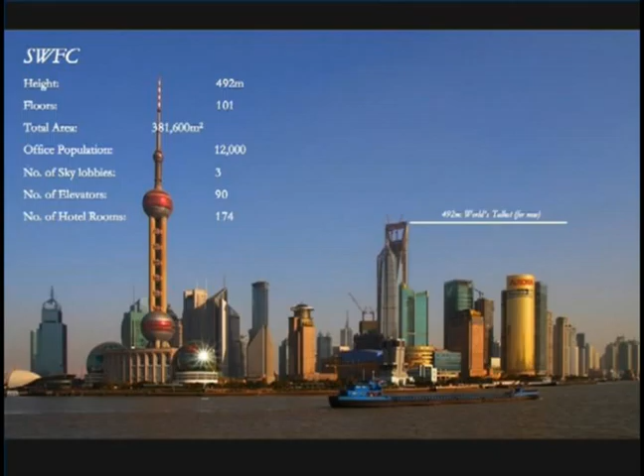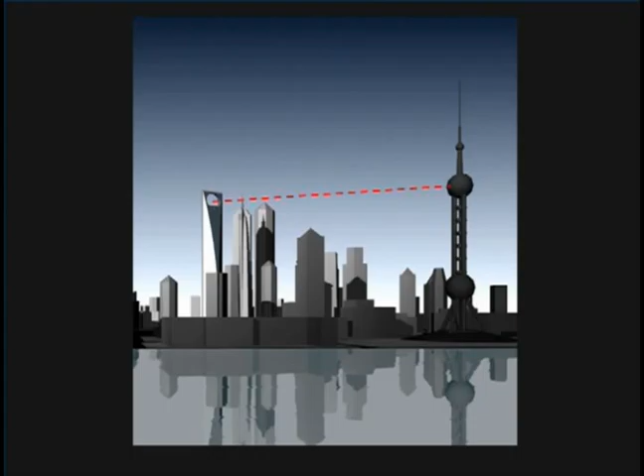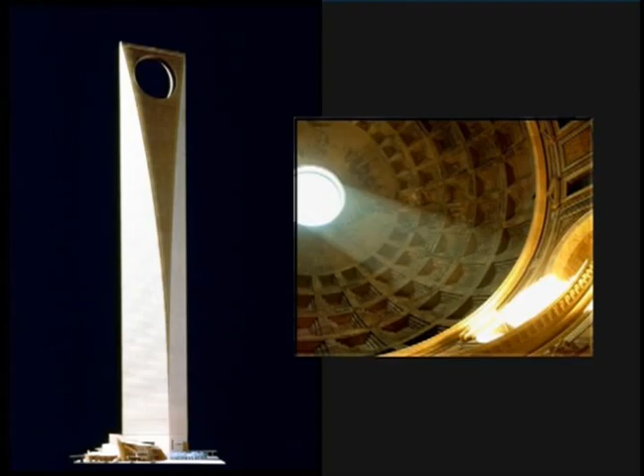So we carved a big window at the top of the building that then faced the TV tower, and the idea behind this window would be that it relieved the tremendous wind loads at the top of the building, therefore greatly making this height structurally achievable. And then this window would be a connection to the cosmos, almost like a sundial. We called it the moon gate, so something that also connects not just to the city, but to something beyond.

Now, this project gained a lot of press because it's being built by a Japanese developer in Shanghai, and the circle was seen as something else other than the cosmic connection or this wind gate that we intended. So the question was what to do with this circle.

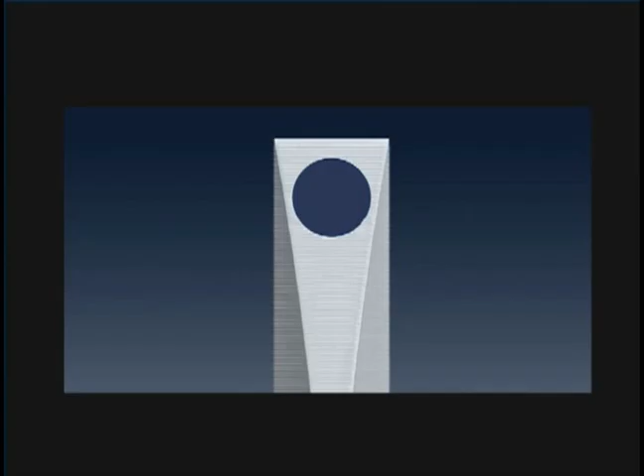Now, this, of course, is a joke, but we did consider at one point to put turbines in this void to try to capture the wind. But when we actually looked at it, and this was discussed yesterday in some detail, when you think about the embodied energy that goes into first taking the material out of the earth, refining it, transporting it, and the workers, all the people involved in that process, and then the food that they eat, when you add all that together, is the output of that turbine really equal to what goes into it? So I call this the sustainability of addition.

I think a lot of trends now are to add double walls, to add photovoltaics, to add a lot of stuff into a box. But what I'd like to talk about today is sustainability of subtraction, in which you take out everything from the building which you don't need, and then try to find in the form, the function, and the engineering of the design an inherent sustainability. And then maybe there is some truth to this old statement.

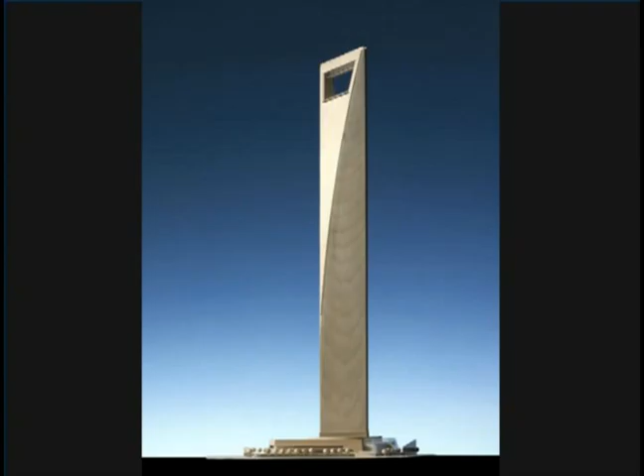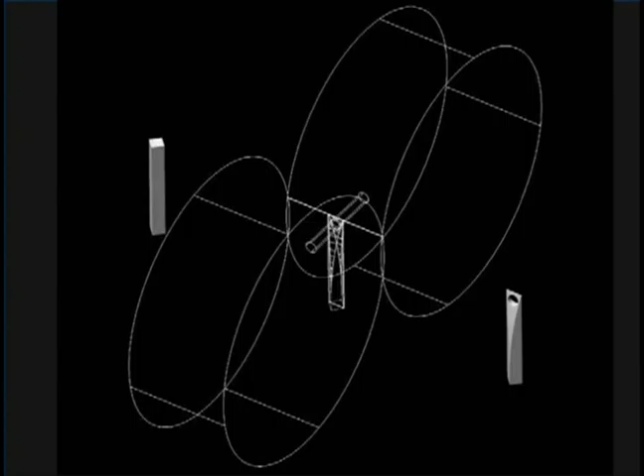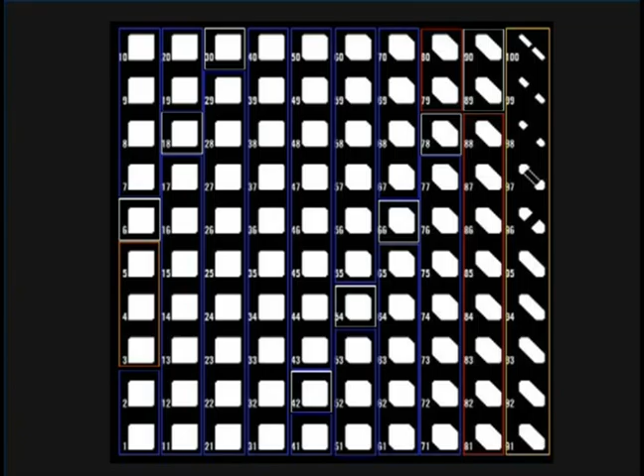By shaving away the building, by carving it, it yields a range of floor plates which are then suited for the office in blue, transitioning to a hotel where you would actually prefer this bar shape in red, and then finally to the observation areas where you really just want a long shape which maximizes the views. So really the result, I think, is one of a sort of timeless purity that really recalls some of the primal beginnings of architecture in tall buildings.

Now, as David Scott mentioned, this conference has been a great place in terms of talking to people, getting new ideas, and using that to refine your own thinking. Lee Morris had a very great presentation talking about the dire state of the climate if we continue our current approach.

So I was thinking about how do we do things not one building at a time, but across the board in one big sweep. How do we make sustainability scalable as well as affordable so that clients will be interested in this? So the idea is, again, to subtract rather than to add.

So if you think of the construction cycle, Burj Dubai was 3 days per floor, Shanghai Financial Center 4 days, only made possible if the forms are rational and systematic. And if you do feel compelled to twist or lean your tower, do it in a very intelligent way. I know David Scott has found some great ways to do this, and I do hope you get to make your presentation someday, David.

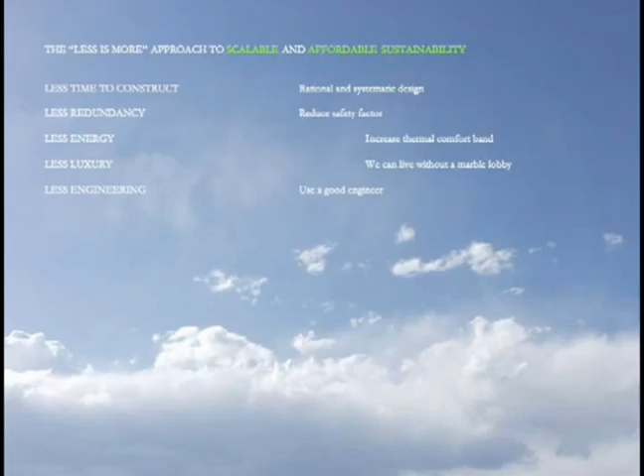And finally, less engineering. I think this is really, you find a good engineer. And what I mean by less engineering is an engineering that is extremely elegant. I think the best engineers I work with are those who have found the simplest solution. And it's often the simplest solution that's the hardest to find.

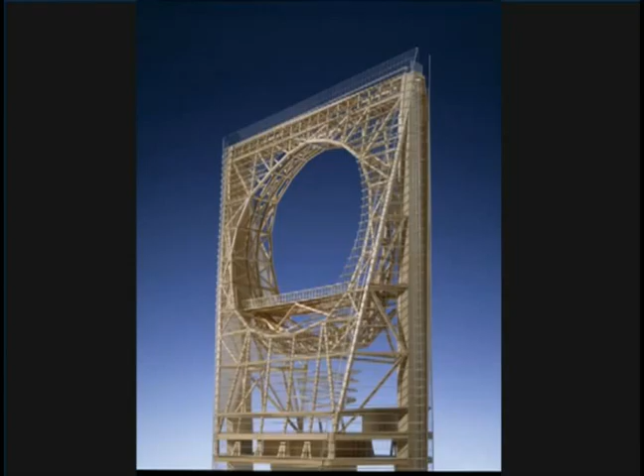So this leads me into introducing Les Robertson, who was our collaborator on this project. This is the Swiss watch that William Baker referred to yesterday. So this is looking behind the facade of the watch and seeing the gears on the inside, what really makes this building tick.

Now, the original design for this structure, the tower was originally 460 meters tall, was essentially a concrete shell with punch windows, extremely heavy, and it didn't quite fit into the image of the building as one of transparency and glassiness and simplicity.

So when the building had to get even taller, and the foundations at this point had already been put into the ground, is when we engaged Les Robertson, a great structural engineer, I also think a structural magician, because he took this structure and he made it disappear. Okay, Les?

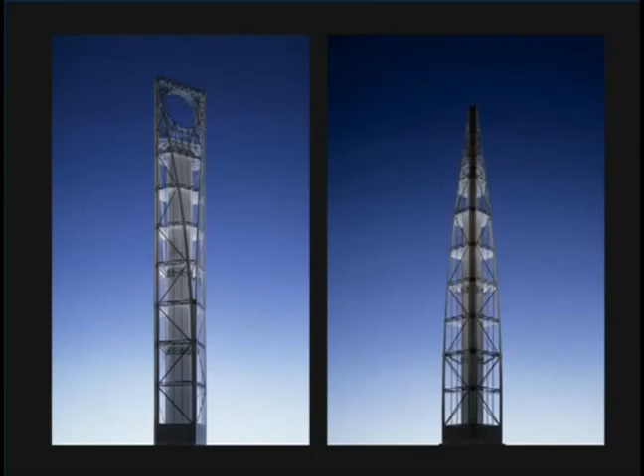Well, I guess the role of the structural engineer in improving the energy consumption is mostly the reduction of materials that go into the project.

And I was going to tell you that we're motivated by such thoughts that we had worked very hard to reduce the material in the project. But David let the cat out of the bag when he pointed out that the foundations had already been installed and that we were going to build a bigger building on the existing foundations.

The project had a kind of a tumultuous history in that it started with concept designs for the structure done in New York and all of the architecture work done in New York. And then structure, MEP, and so forth all moved to Japan. Designs were completed.

As Mr. Malott pointed out, the foundations were installed. This was the piling.

At that time, a major Japanese company, Nippon Steel Company, came to us asking if there was a better way to do the structure. And we thought about it a little bit. We said yes, there was, and produced some designs. And just at that point in time came the Asian financial crisis, and the project went on hold.

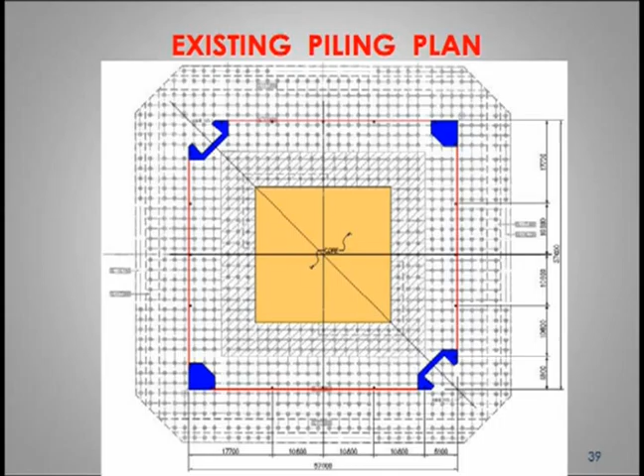Existing piling was laid out assuming that there would be loads from the services core and then 4-point loads at the corners. We realized that we had to enhance not just the piling, but think about how that load was distributed to the piling. So we put in a distribution network above the mat foundation so that we could take loads from the services core and distribute them outward, and conversely take loads from the exterior wall and distribute them inward.

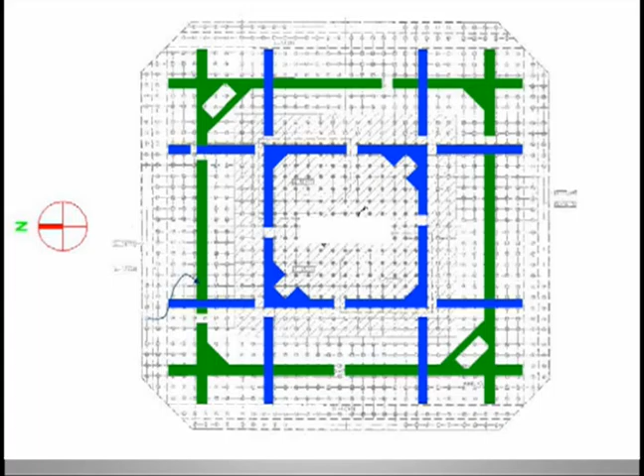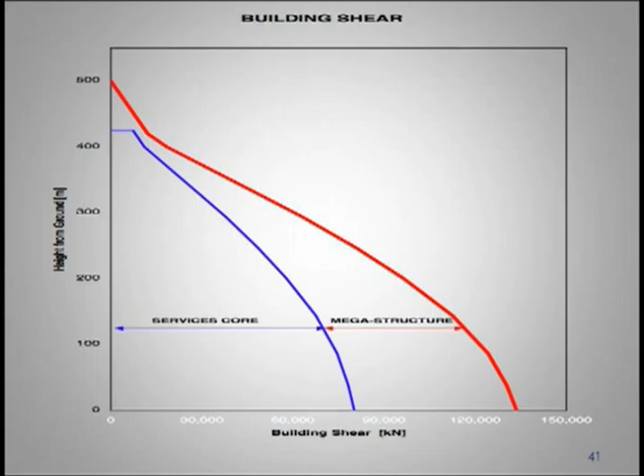This is one of a variety of distributions that we tried, looking at how we would divide the load between the services core and the perimeter structure. Now, fundamental in our belief for the design of a major building is that it be very robust and that it be very redundant.

So our approach to this was to use small columns on the perimeter of the building and to transfer the loads from those small columns to major columns, mega columns if you will, in the corners. In this way, we could design the building so that we could take out all the little columns at any level of the building, and it did not result in further collapse of the building itself.

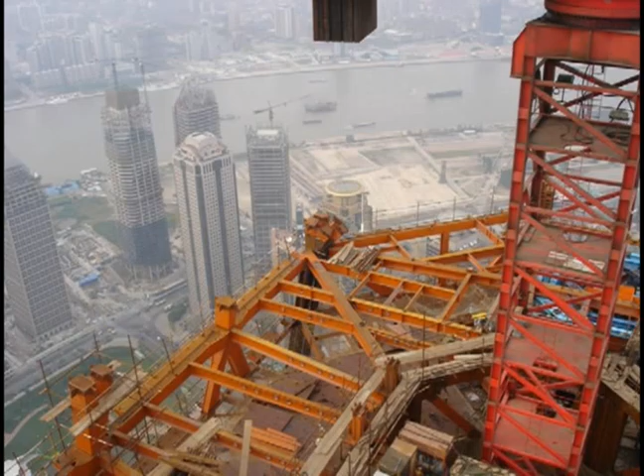And conversely, we could take out these distribution trusses. We could remove one, and still the structure would remain stable. So the kind of robustness and redundancy was fundamental to the design of the project. And here you see up in the airways one of those belt trusses going into place on the left side of the screen.

We used outrigger trusses, and normally outrigger trusses are organized so that they cross the services core—there's nothing wrong, it's a perfectly good way to do it. But in this case, for a variety of reasons, largely because of the shape of the building, the services core was laid out across the diagonal, and therefore it was not practical to carry the outrigger trusses across the core. So we carried them around, and the truss work you see here in red is in fact ultimately buried in reinforced concrete.

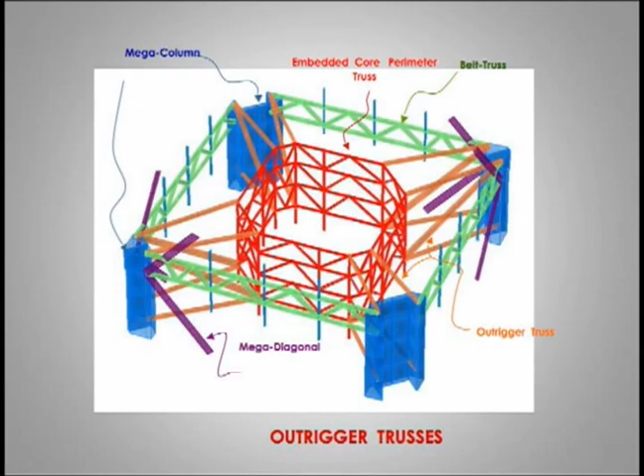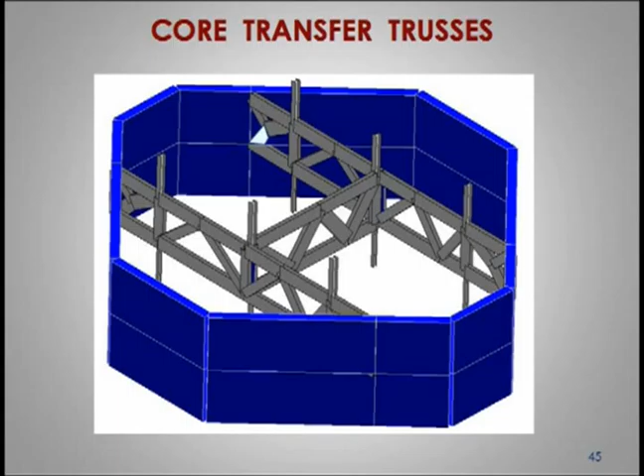And in the services core, we had a similar thought: the columns that support the loads in the center of the services core are transferred every 12 or 15 floors out to the walls of the services core itself. Again, this was designed so that if something should happen to one or more of those columns, it did not result in a catastrophic event in the building. In fact, if one of the trusses were taken out, it again did not result in a catastrophic event for the building itself.

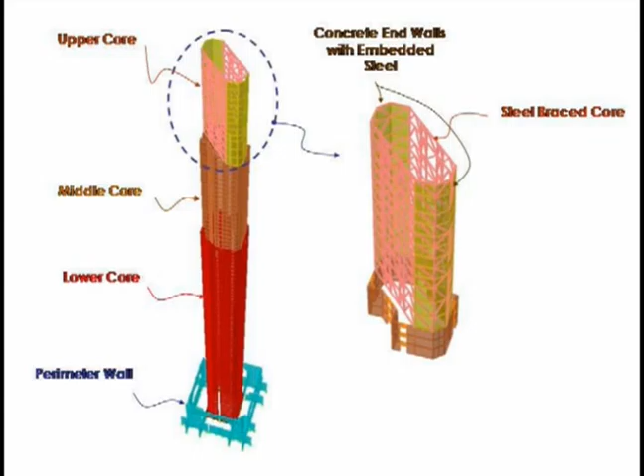And there was a further advantage: now all of the basic load carrying capacity in the building is in reinforced concrete. By using appropriately equivalent concrete strengths and properties in the core and in the mega columns, the issue of differential shortening between the various columns is reduced quite significantly. Also, all of the steel columns can be made quite small because conceptually they're the same height from the bottom of the building to the top, designed to carry their immediate load down to a transfer truss, and also to be able to step in and carry additional load where required in the event of the failure of other columns or trusses.

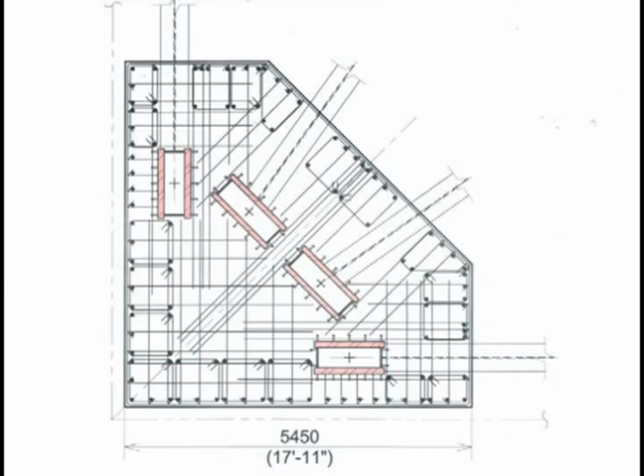The services core steps back as the building steps back, in the same direction. Now, those of you who work in earthquake design realize that lateral transfer of shear walls is a significant problem, and that was worked out through a variety of techniques developed in considerable detail with the seismic experts of the People's Republic of China.

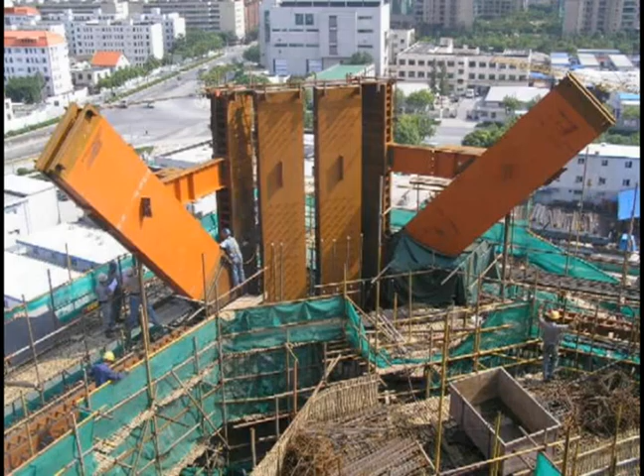These big columns in the corners of the building are in fact big columns, because they are carrying, in essence, almost all the weight of the building in reinforced concrete.

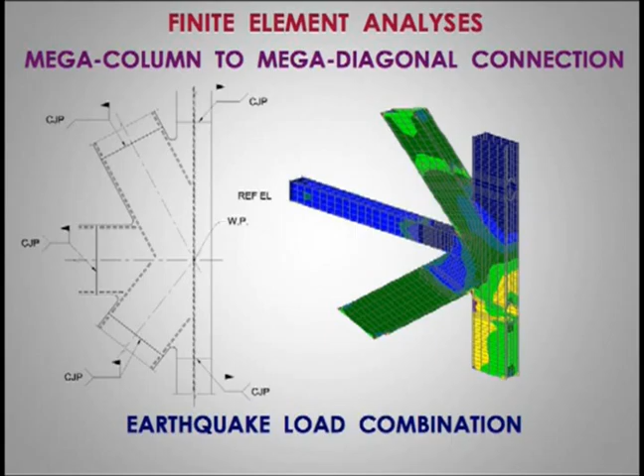So these columns have a dual function. They tie together the structure, the structural steel brace structure on the perimeter, without the need to create three-dimensional connections in the structural steel. If you look at the columns here, you see they are separated. They are not in fact connected except by bonding them together through the reinforced concrete. It's a kind of moment-free transfer between various elements of the structure, and it bonds the entire perimeter structure into a single structural element without the need for those three-dimensional connections in structural steel.

And here you see, in full scale, one of those columns. The construction was, as Mr. Malott said, roughly a 4-day cycle for the building, for the major structural steel components.

The connections of these major elements were accomplished in a way that's in some ways unusual. These are all box members, but the members in the horizontal plane, the ones going in and out of the picture, are in fact not connected at the ends. They're used to stabilize the box section, and they contribute to the L/R of the members, but they are not actually connected. This is done simply to save money and material, since the strength requirement for the box section is on the 2 side plates, not on the remaining 2 plates.

Seismic design was a very major consideration in the project. Although Shanghai is not a great seismic center, the Chinese experts and ourselves were both concerned because the building was substantially outside of the experience of the People's Republic of China. So many different kinds of earthquake analyses were performed.

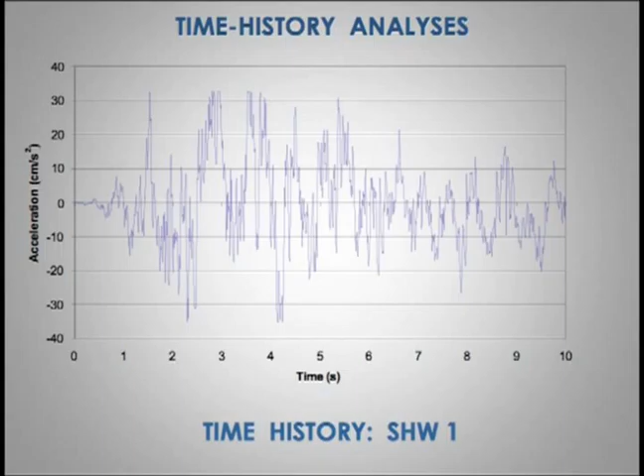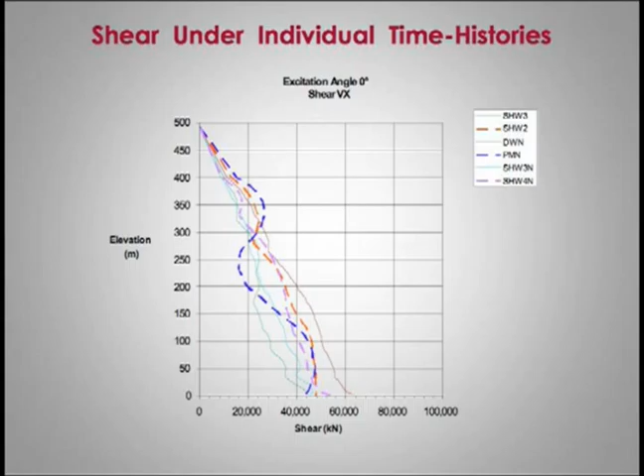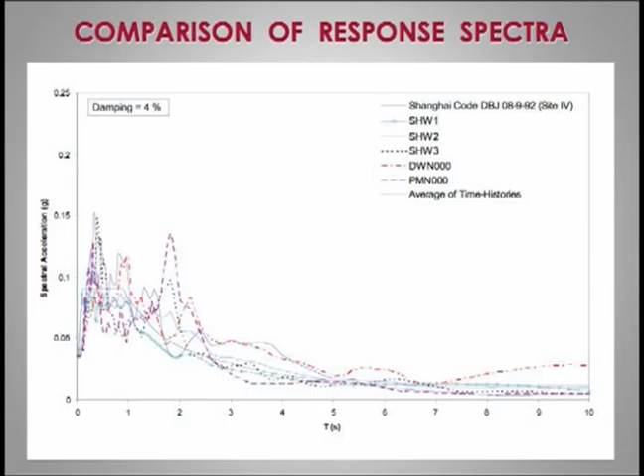And the response spectra is kind of interesting. We were quite surprised because when we put a bunch of them together, we found that the Chinese code and the average of all these were more or less in line. Now, our structure is way out on the end here, in the 6.5 second period range, so the differences were not significant.

I know some of you who attended the session yesterday afternoon appreciate the fact that there are great uncertainties. The actual waveforms that the structure needs to respect are quite significant.

We modeled pretty much everything in the building in order to fully understand the behavior of the project. One of the more interesting ones is the pushover test. For those of you not into such things, imagine the Jolly Green Giant leaning against your building and he pushes and pushes and pushes until it falls over.

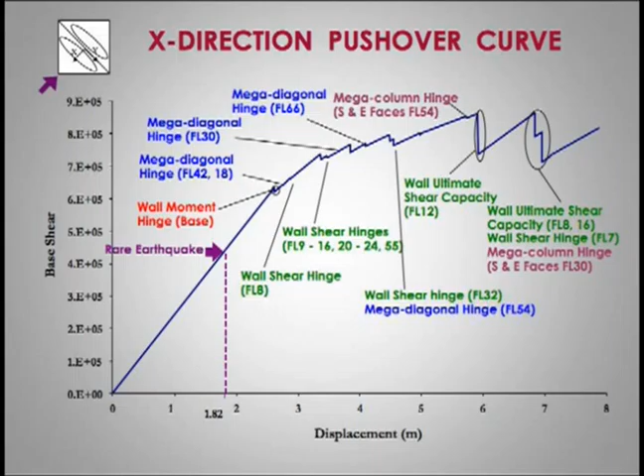This is actually an early rendering of the pushover curve. For the rare earthquake, we had a certain level of deformation, and then we started to develop moment hinges in some of the walls, and then the mega diagonals. None of these are really critical to the stability of the building itself. Then more wall hinges, and ultimately we started getting mega column hinges, and then you start worrying because you realize those will ultimately lead to the collapse of the building.

But you see, that's almost 4 times the lateral deformation expected in a rare earthquake.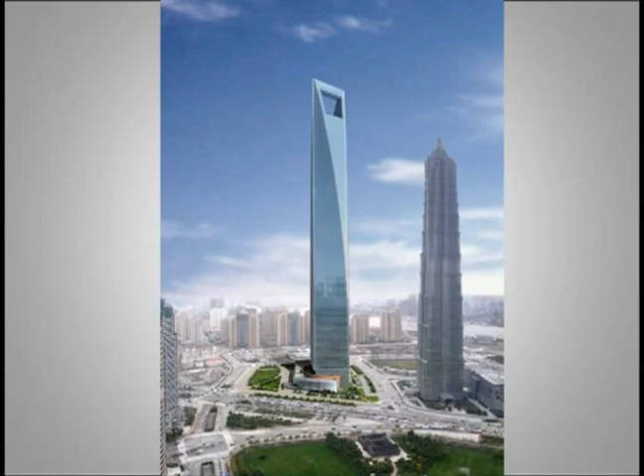David didn't talk to you about the shape of the hole at the top of the building, and if you want to know about it, you'll have to ask him, because I refuse to answer that question.

But the original, what did we accomplish? Well, the original building, if we stood on the inside and looked out, it was, as I said, a kind of Sears Tower structure, a very satisfactory structure. Nothing wrong with it at all.

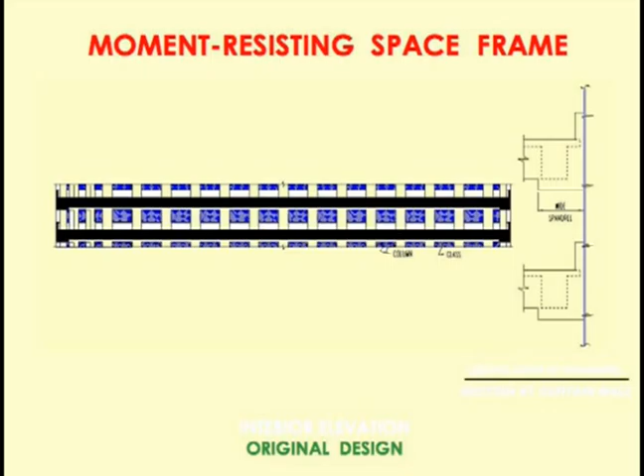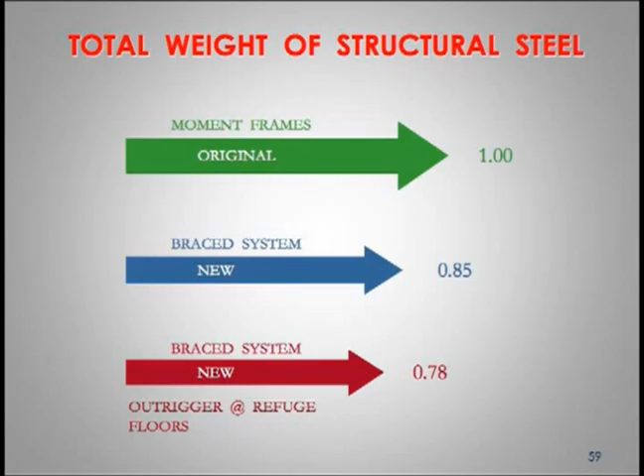Structural steel weight, I show 3 here: one as originally designed, then using the brace system, and then the brace system with outrigger trusses. So you see we obtained at least a modest reduction in the weight of structural steel in the building.

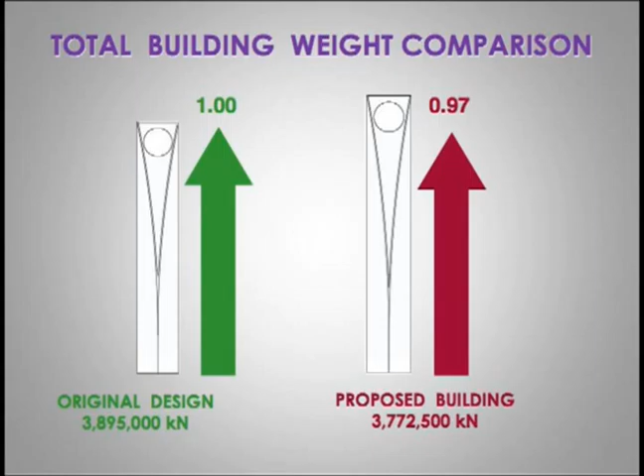More important was the total building weight, which we were able to reduce while still making the larger building. And then some construction photographs.